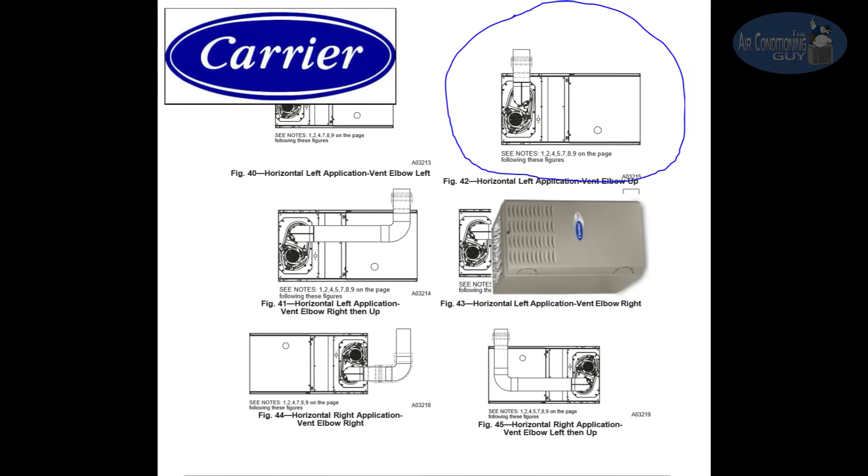And every other furnace that I've installed, you know, Payne, Carrier or whatever, you just turn the draft motor and take out the knockout, and out you go with the vent pipe. I had never, that's my fault, never read in the installation instructions, which he pointed out to me. It's right there, so I appreciate that. Never had I seen that you had to order a little offset kit for the vent pipe to line up through that knockout that Goodman put there.

But no one, not even anyone in Goodman had ever told me, hey, if you're gonna install it horizontally. But I know it's on me. The burden is on me as the installer. I should read the installation instructions. But coming from installing Carrier furnaces and Lennox furnaces, actually I don't remember if the Lennox furnaces have that, but I remember that in the Carrier for sure you just turn the draft motor, you take out the knockout, and out it goes.

Coming from that to Goodman, and I see the knockout there, so that's where I made the mistake. I assumed that you do the same thing with that Goodman furnace, and then it just wasn't engineered correctly, which is fine. I mean, if you need that additional part, I checked on it. It's not that expensive. It's like 12 bucks. Fine, I'll order it, except I wasn't aware of it.

I didn't pay attention. In fact, I just called my store because Mondoandrade sent me the page where it comes out in the installation manual, and he sent me the part number. So I called my store. They didn't even have it in stock. I called another store previous to that one, and they didn't know anything about it either. So obviously it's not something that is commonly used or asked for by the installers. So hopefully this might help out other installers too that install Goodman furnaces.

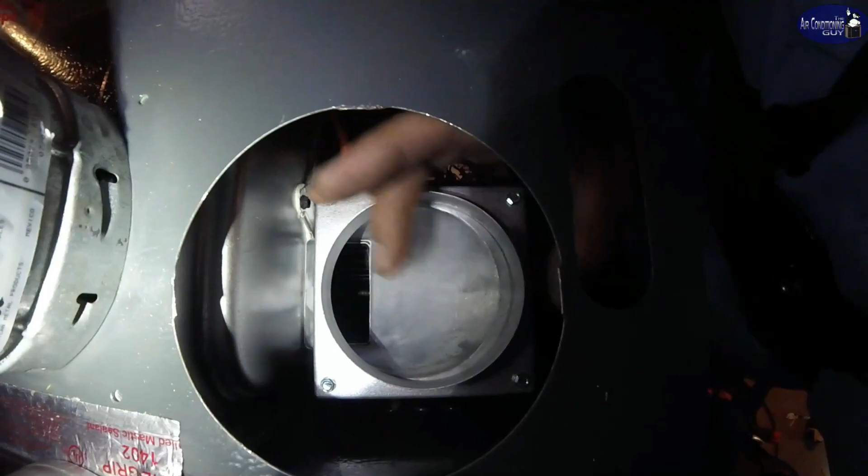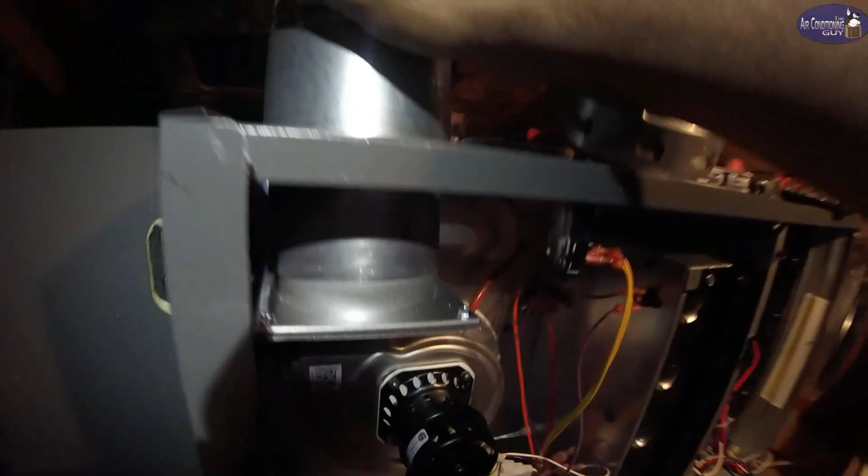All right, I got another suggestion. I couldn't record the sound, there was too much noise in the background. When I turn the inducer draft motor to vent up in a horizontal position, this knockout does not line up with the flue vent. So I suggest maybe Goodman might want to get on this and relocate that knockout so that it lines up. I'm trying to show you right here how it lines up crooked. You can see how it doesn't line up. Yeah, see. It's a small thing, I know, but still it's annoying.

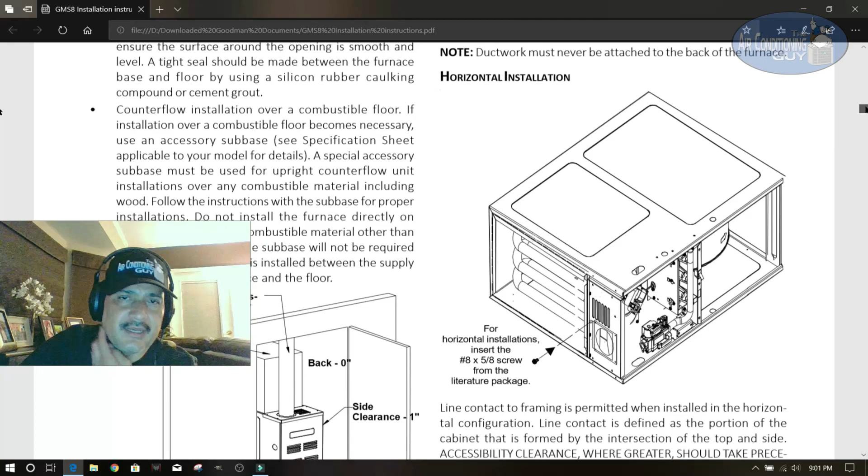Alright, so here we are again. Now I'm showing you the installation instructions for the GMS 8. This is also the same installation instructions for all these other units. They're pretty much the same, that's why they throw out the same instructions. But I already looked for it and I found it here. It's gonna be on page 9. I already highlighted the part where it talks about the venting. Here it is, and it comes out twice actually right here.

The upflow or horizontal units are shipped with the induced draft blower discharging from the top of the furnace, and that's viewed as an upflow installation. So the vent will come out through the top. If you flip it and you're going to install it horizontally, then the vent's going to come out on your left. You can put an elbow and vent that way. But here's where you run into that problem: if you want to vent vertically and you want to turn the induced draft motor for whatever reason, like right here, this is what I chose to do, then you do have to get this kit.

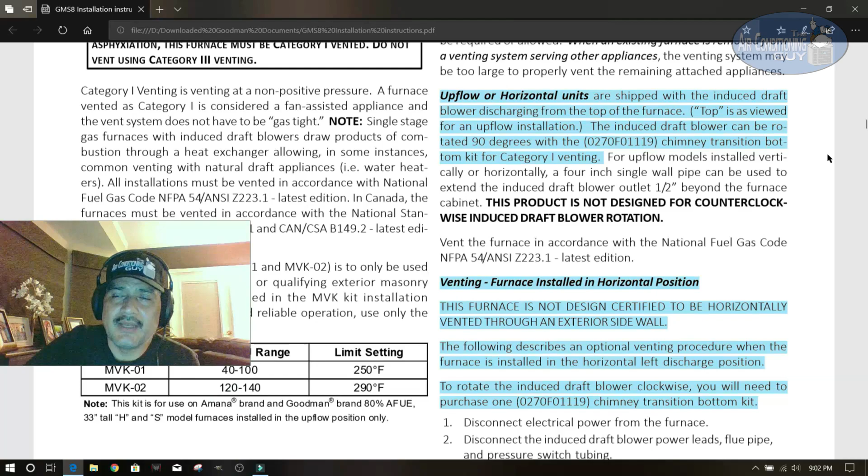The induced draft blower can be rotated 90 degrees with the 0270F01119 chimney transition bottom kit. So you have to have that, and it's not expensive. It's really cheap. Your store might not even carry it. Like mine, when I called them, they weren't even aware of it. But Mondoandrade from Instagram texted me the part number. I called them, they found it, they ordered it for me, and then they ordered some extras.

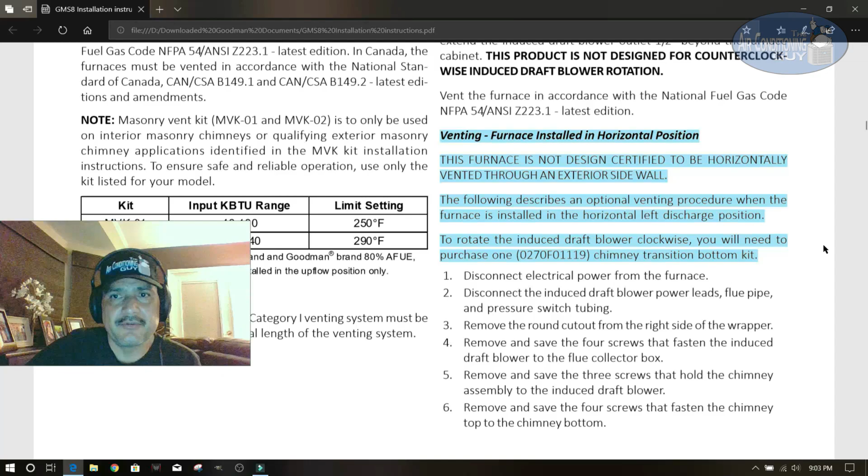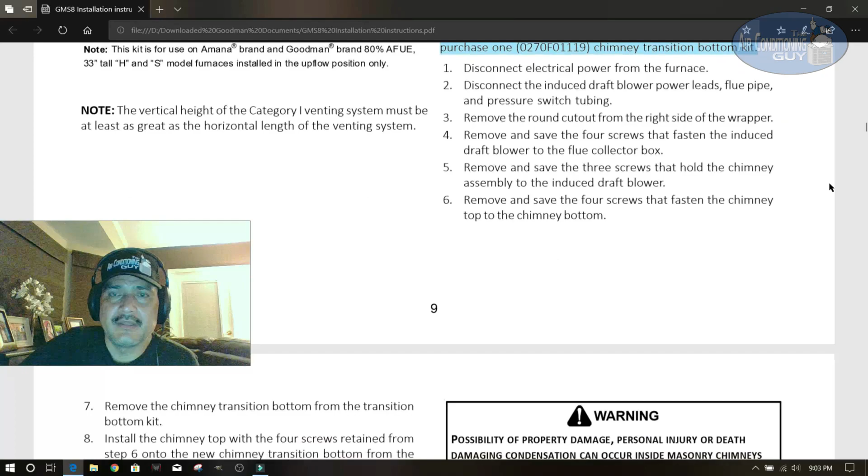So that's why I like dealing with Goodman, because they don't care that you're not a big corporation. They go out of their way to help you out. So that's a big plus for Goodman. And then right here it goes on giving you the instructions on how to do it, which, you can imagine, is real simple. And right here too, real easy.